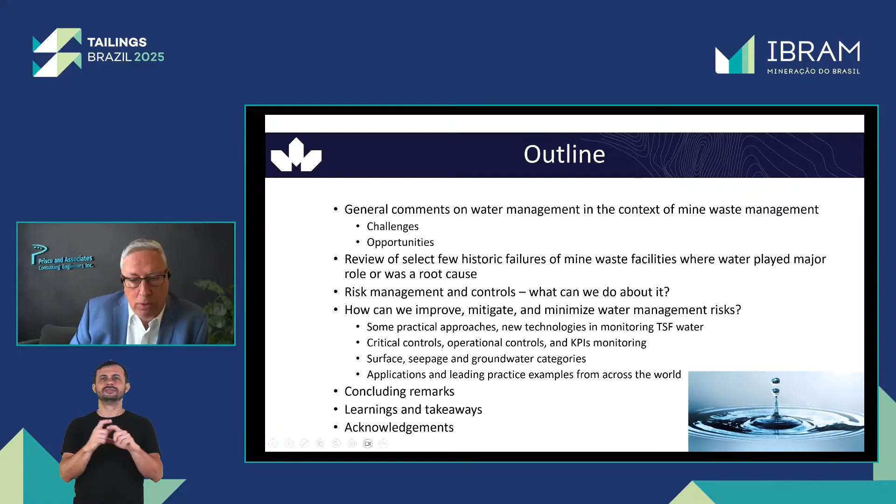So there are some challenges and opportunities with mining waste management and the water management within this. So the first fact, I would call it, is water is either too much or too little. So in a nutshell, nobody's happy.

If you have too much water, tailings managers don't like it, and mining managers don't necessarily like it either. Exploration teams don't really like that either. But if we have too little water, process managers don't like it, communities don't like it, and the stakeholders are not happy with it.

So I put here a couple of numbers that give you a perspective in Canada and the world. You can see in the world you can have variations from the driest place on Earth, which is the Atacama Desert, where you get 5 millimeters a year. So basically it's almost dry by the time it touches the ground.

And the wettest place is somewhere in Mawsynram in India, where they have close to 12 meters of rain a year. So that is basically 11,872 millimeters. So how do you deal with this?

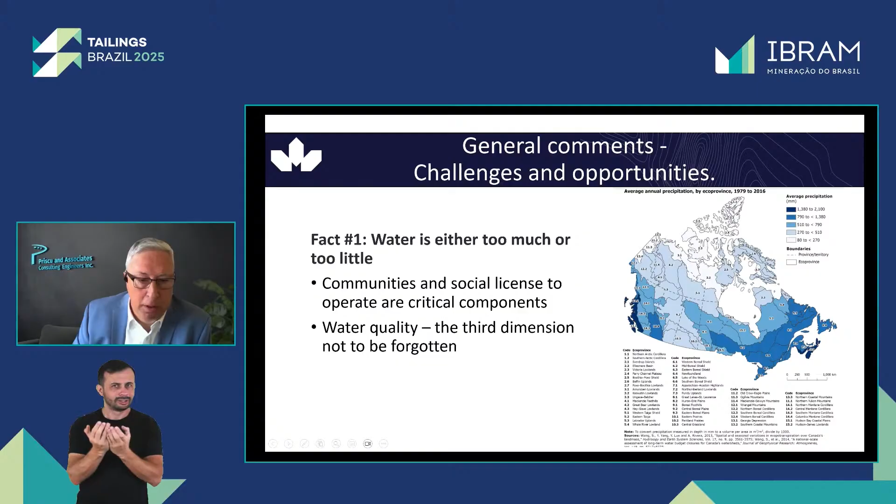And this is very important for everybody to understand. I think many of you in the room would know we had recent failures of even heap leach facilities, tailing stacks, overburden stacks. So just because it's a low moisture content, it doesn't mean risk is not there. We still have to manage it.

This is an example of one of the facilities in Canada on the left side. That is a filter stack tailings facility. This is courtesy of formerly Newmont Mining, a very nice facility, but still the efforts are there to monitor it, to inspect it, and to investigate it regularly.

And then the right side is a paste central cone discharge that, even if you think paste, you still have — you can see in red — some of the embankment dams that you need. So whether you like it or not, there's still water in the blue color, and you still have dams to contain it. So we are not done with it.

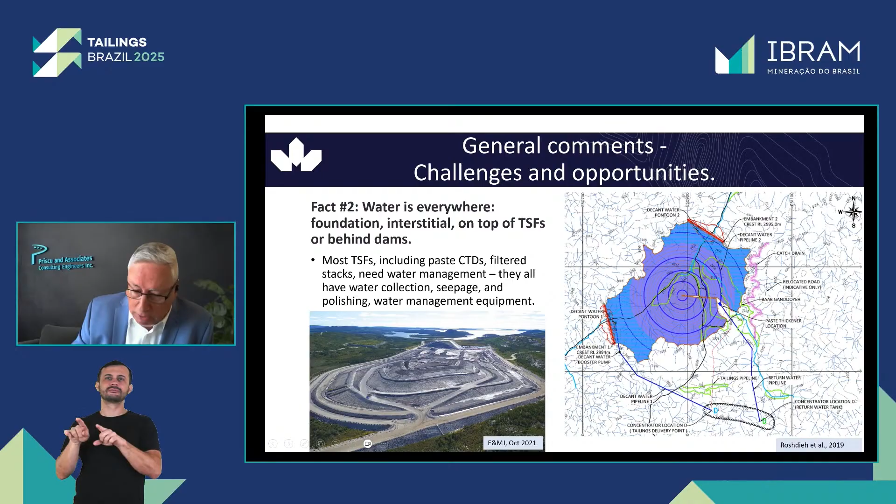Also in the filter stack here that looks so nice, actually in the background, I'm not sure if you're going to see it, but there's a perimeter dike for the entire facility, and at the back there's a water pond and sedimentation pond. So we still need to deal with a lot of water in these situations.

And this is just a summary of some of the tailings facilities that are mostly in South America, which are on the right-hand side. You see here the projected dam height. And just a reminder for those in the room, these are 3 of the top 5 tailings dams in the world in terms of height.

You have the Enlozada tailings facility, courtesy of Freeport, on the left. You have the Cortadera tailings dam, courtesy of Anglo American, in the middle, and the Quebrada Blanca 2 on the right side, courtesy of Teck Resources. Just to highlight that all of these are approved to go over 300 meters. The first two are in Peru. The third one is in Chile.

And the middle and the right side photos show starter dams. So what you see here are just the starter dams, which are between 85 and I think 110 meters tall. So these are basically amazing engineering feats, and kudos to all the teams that were involved in designing and operating this.

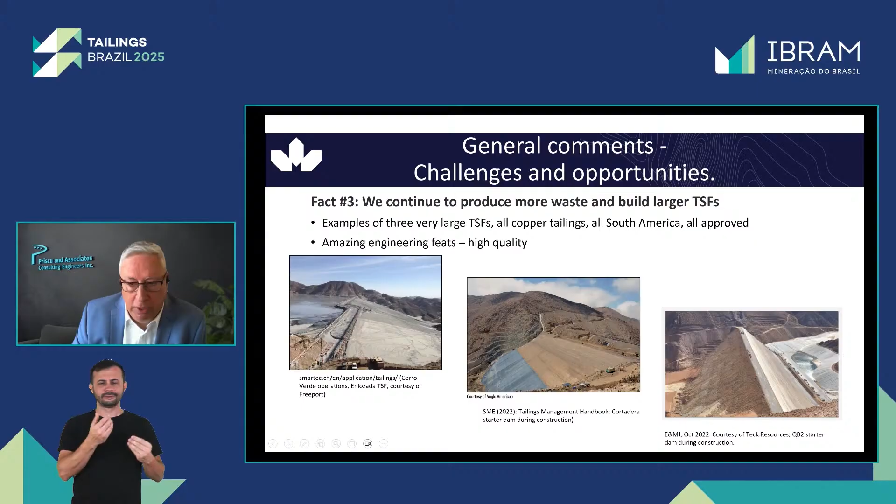But fact number 4 is if you don't have data, there's not much risk management that you can do. This is a famous quote from Edwards Deming, who was actually an economist: without data, you're just another person with an opinion. So we're going to talk today about data and the importance of it in water management. And of course, it all starts with the knowledge base, the information that you have, gathering as much from concept all the way to closure and post-closure.

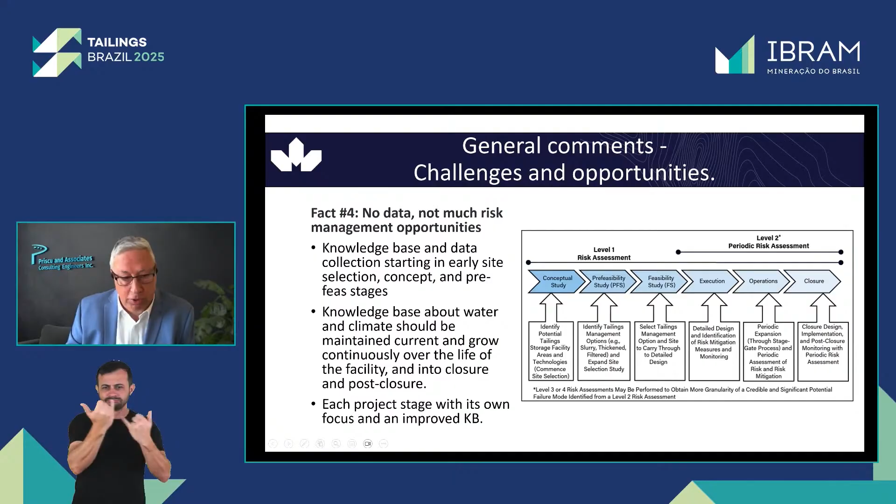There's a lot of technology and data collection from site-specific data. We need to invest in instrumentation and build that knowledge base. We also need to apply climate change models with caution because, to my knowledge, there are about 16 climate change models. I'm not a specialist in climate change models, but each site, each location, each geography is specific, and you need to select the right model.

One model, for example, for the Andes Mountains at, let's say, 4,500 meters, you don't apply the same model as for northern Finland or beyond the Arctic Circle.

These are examples of instrumentation that we need to collect, including the bottom right photo, which is basically an evaporation and climate data collection system that is actually on top of a tailings facility. It's not nearby, it's not at the plant, it's not at the end of the property — it's on top of the tailings pond.

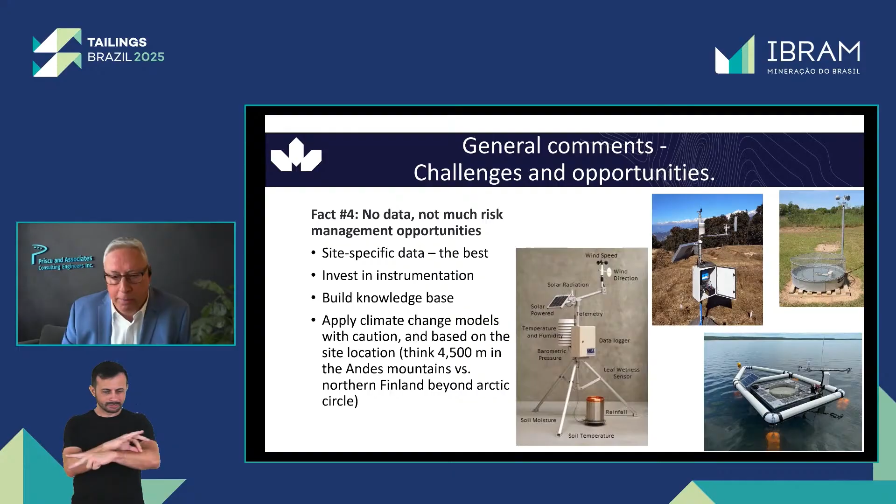So water needs to be included in a regional water balance. A site-wide water balance may not be enough. And of course, calibrations and good quality data are essential.

Fact number 5: I'm not telling you anything new here, but I want to stress that there's a big gap noted in tailings professionals. I've seen some comments out there that it's not really true that we have enough people — I don't think we have enough people. And I would say, as a former consultant, current consultant, but also a former dam owner, the mining industry is actually stealing a lot of bright minds and young engineers from the consulting world, and we are not solving that problem. So we need more training, more specialized courses in universities, and we also need governments to actually recruit quality technical staff to help in this process.

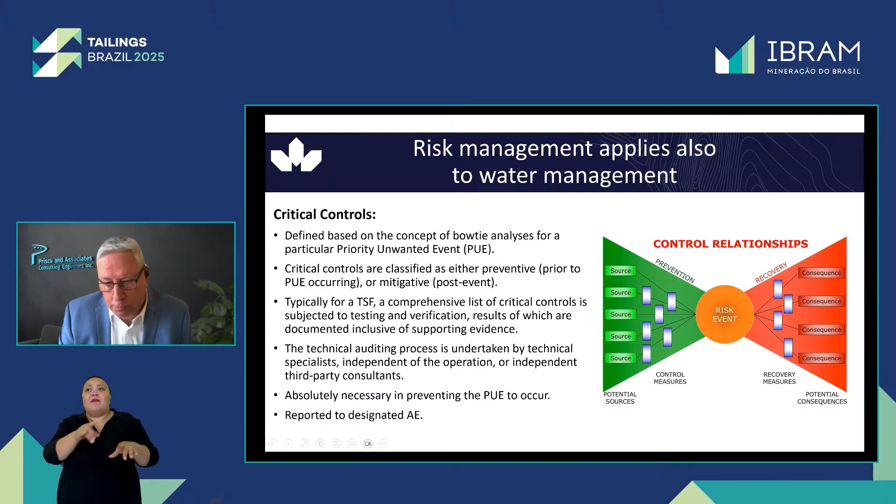Definitely, critical controls are the ones that you want to look at when we are talking about dam safety, and it's a governance approach that is managing high consequence risks. You're familiar maybe with the bow tie approach for risk management. So basically, critical controls are defined based on the priority unwanted event. You can have preventive controls on the left side here in blue, the blue boxes, or basically recovery/mitigative controls after the event. There are many examples in the world, and I'm happy to chat about them, where even after the event has happened, these are super critical to minimize consequences.

Risk controls are typically designated as critical controls if the implementation of the control would significantly reduce the likelihood or consequence of an unwanted event. So it's very, very important to understand what a critical control is.

You basically set up your management, your instrumentation, your trigger action response plan based on critical controls. Operational controls are not critical controls. So when somebody says, for example, your pond volume goes up by 500,000 cubic meters, that's an operational control, not a critical control. The dam didn't fail because the pond went up a bit.

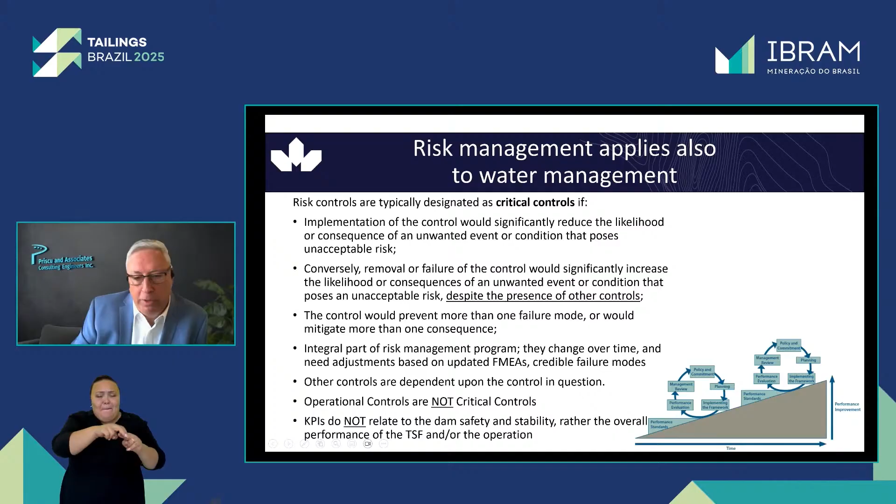Also, KPIs do not relate to dam safety in general, and they rather reflect the overall performance of the TSF. So I just selected a few. I'm not going to spend a lot of time because I want to go into the mitigation.

But are we truly learning from past events? This is a quote from the Irish writer Oscar Wilde, who has a fantastic quote, and I'm sure many of the academics in the room will have a smile when you read this: experience is the hardest kind of teacher — it gives you the test first, and then the lesson afterwards. And it's very much true that we need to be ready all the time.

The Aberfan disaster in Wales, with 116 children dead and 26 adults. You know that — I'm not going to talk again about the geotech, but what was the issue here with water management?

Site investigations were not properly done. The dump was sited over a natural spring, and together with a heavy rainfall event, that went straight into this small town, where there were a few schools. This was a terrible event in '66. So it shows the importance of extreme rainfall events, but also quality hydrogeology — it's critical.

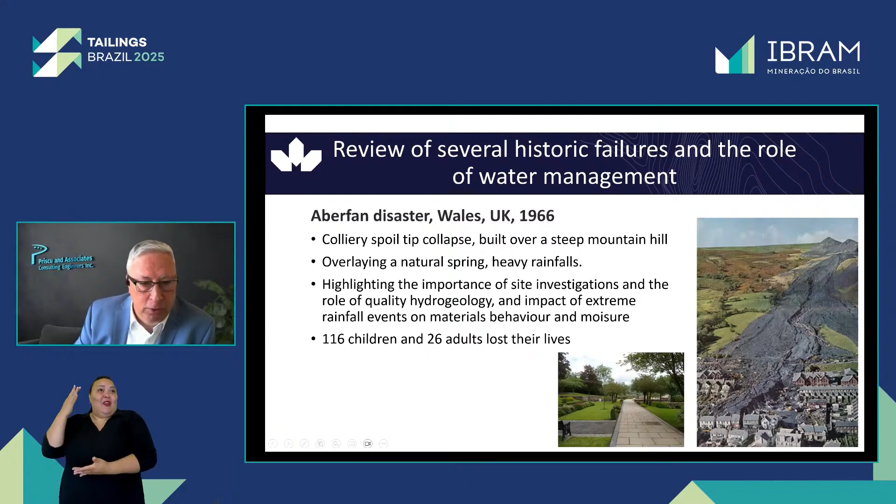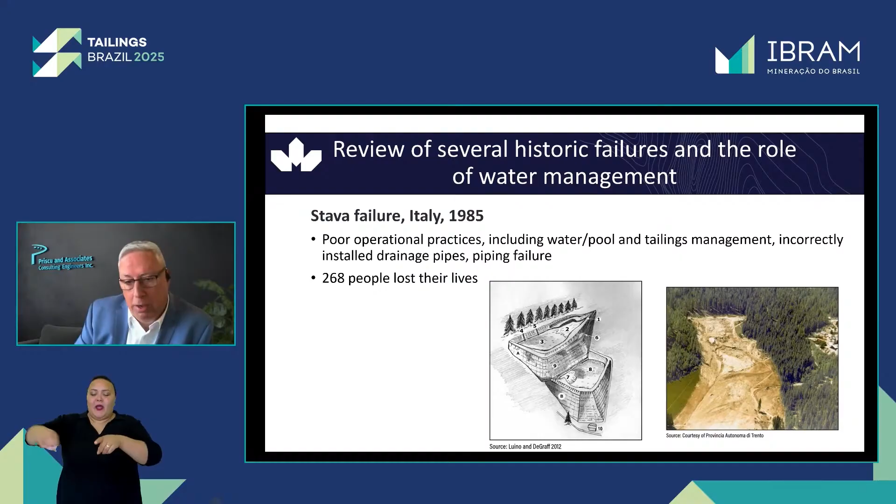This event, Stava, in '85, again water was the culprit. Poor operational practices, poor pool control, incorrectly installed drainage pipes, and piping failure that was spotted but not fixed. Unfortunately, 268 people lost their lives.

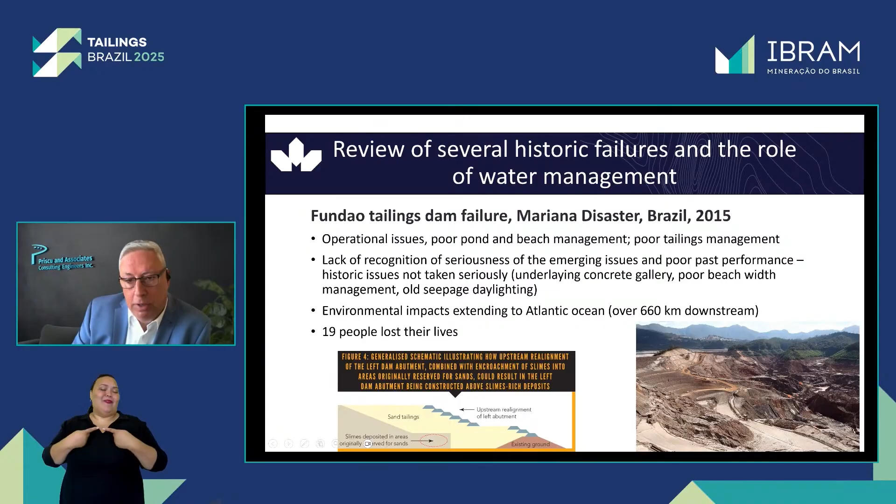And of course, you're familiar with Fundão, and my heart goes to all those affected by this. Again, that was another example of a lack of recognition of emerging issues that existed many years before the actual event. I have a couple of sketches here - the original was supposed to be a low phreatic surface with no slimes here, whereas on the right side it was a high phreatic surface. If we had managed the water and the phreatic surface better, maybe things would have been completely different.

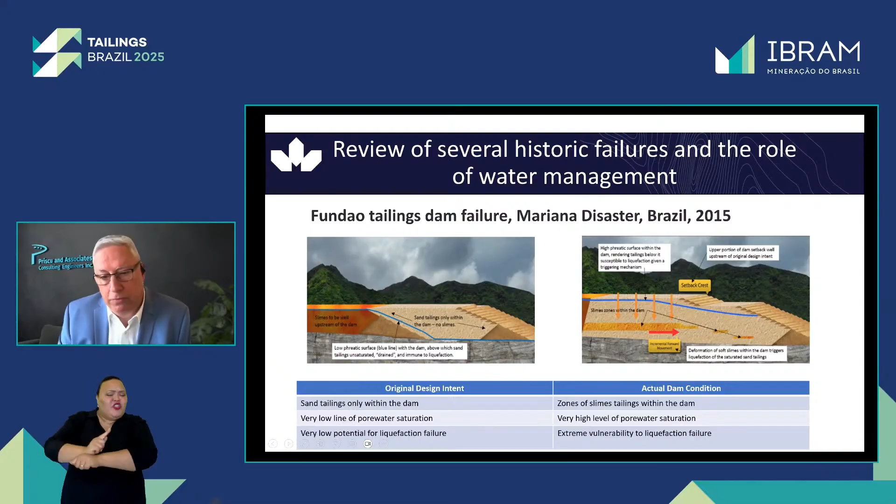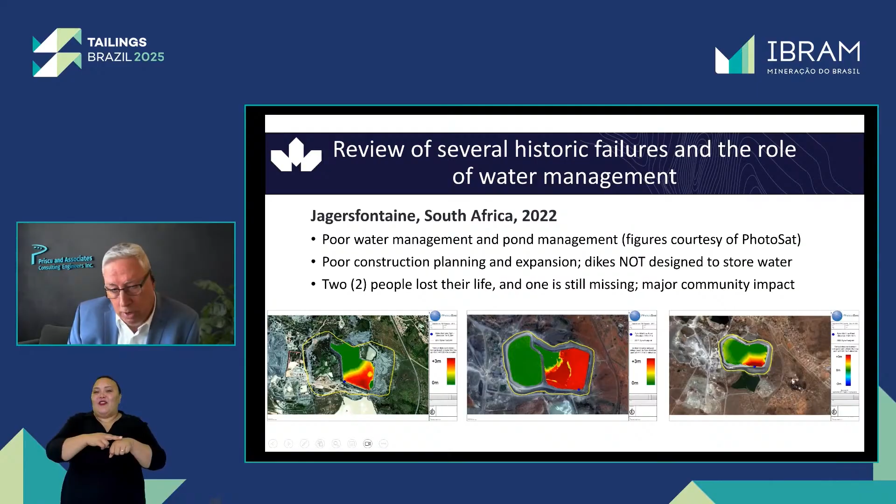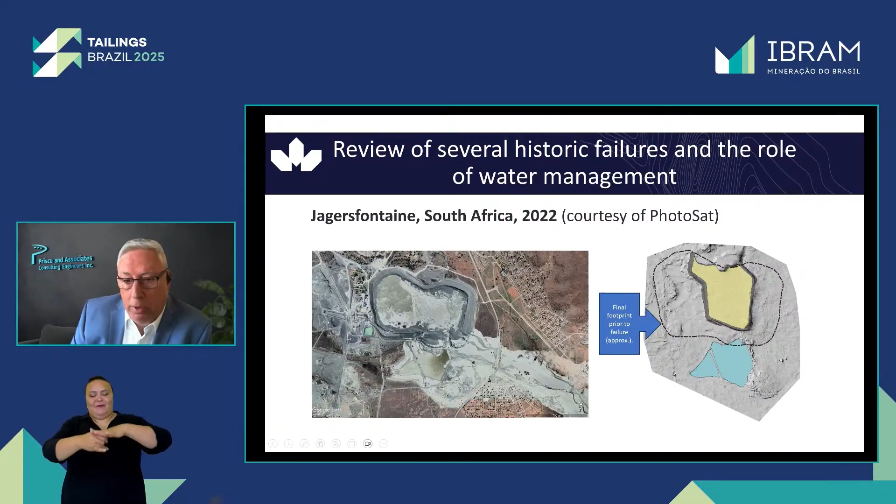Last but not least, I wanted to highlight Jagersfontein, again in South Africa in 2022. Very poor construction planning and expansion, and importantly, the dams and dikes were not designed to store water. Even though this was an old facility, the latest owners - you can see on the left side, the yellow shows the final footprint of the facility, and this was the original. What's shown in green, in reverse here, is that there was almost no freeboard left - very, very poor management. This is the final footprint after the failure, where you can see it was actually touching a downstream pond. So something happened there where you have a wet toe, and also you expanded this with dams that were not designed to hold water behind.

So what I'm going to show you now are real case situations from around the world. I know some of the mining companies in Brazil are up to speed with a lot of this, but I think it's important to share knowledge and see what others are doing. These are real case studies I want to show you - data centers, surface water, monitoring seepage, operational controls, water balances, technologies, and critical controls, what to look for specifically.

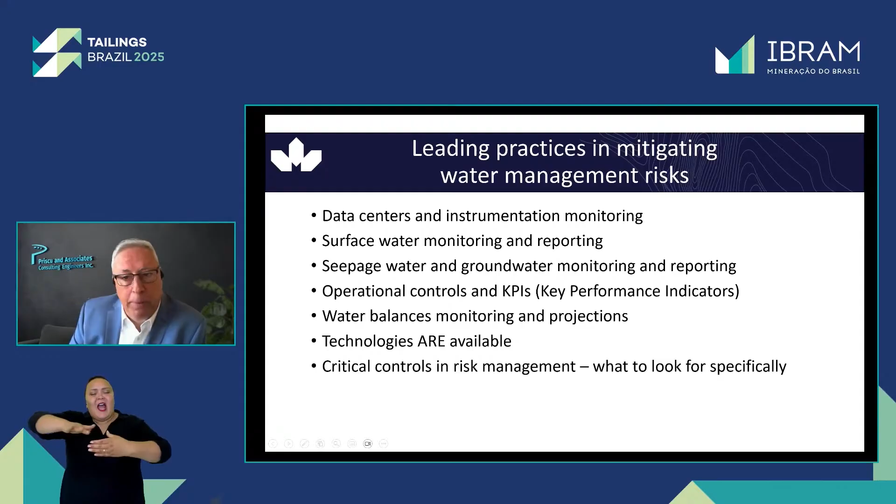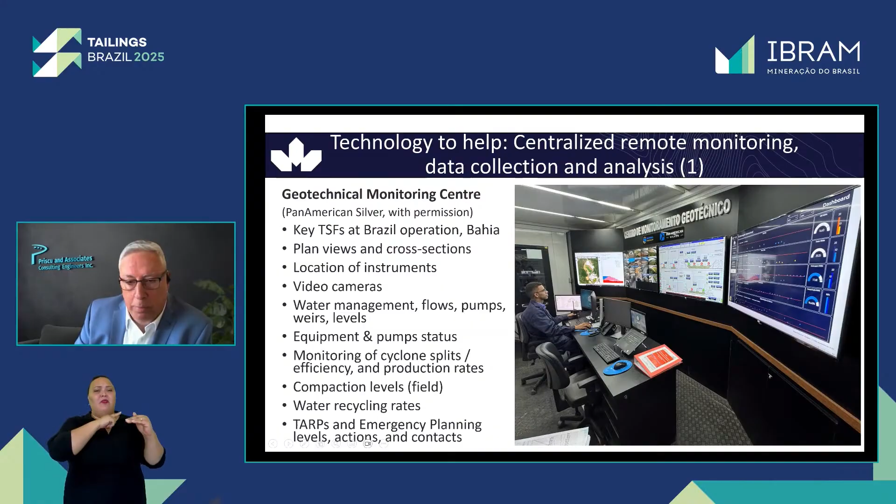This is an example courtesy of Pan American Silver in Brazil, where you have a center. I know other companies have similar centers, geotechnical monitoring centers, but what's interesting to highlight here - you have the cross section in the background of the dam, the view, and in the middle screen they have water management: flows, pumps, weirs, levels, equipment and pump status, even monitoring of the cyclone splits. It's automated and included here. On the right side in the blue screen, they have the critical controls already plotted, including water recycling rates and compaction levels and so on. So a good way to have everything at hand, including water management, tailings management, and flows.

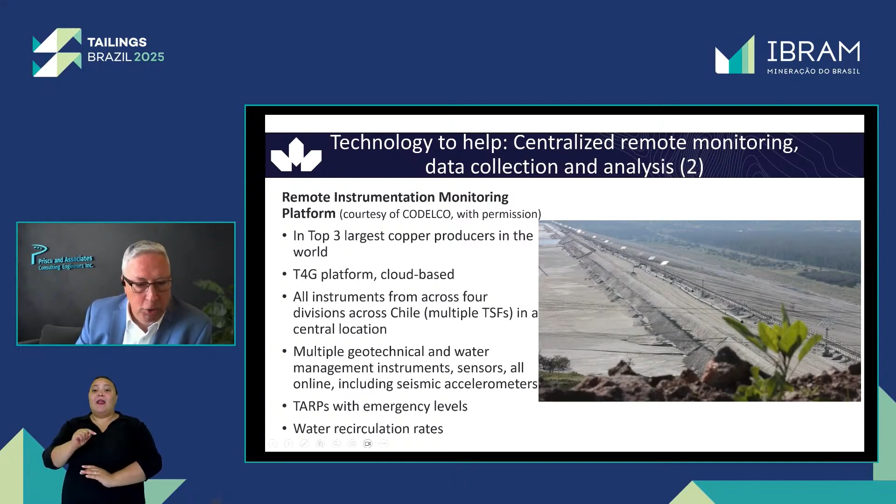This is courtesy of Codelco, with permission - appreciate that. This is one of the major facilities in Chile, belonging to Codelco, one of the top 3 largest copper producers in the world. They implemented a T4G platform where all the instruments come to one center, both geotech and water management, including TARPs with emergency levels.

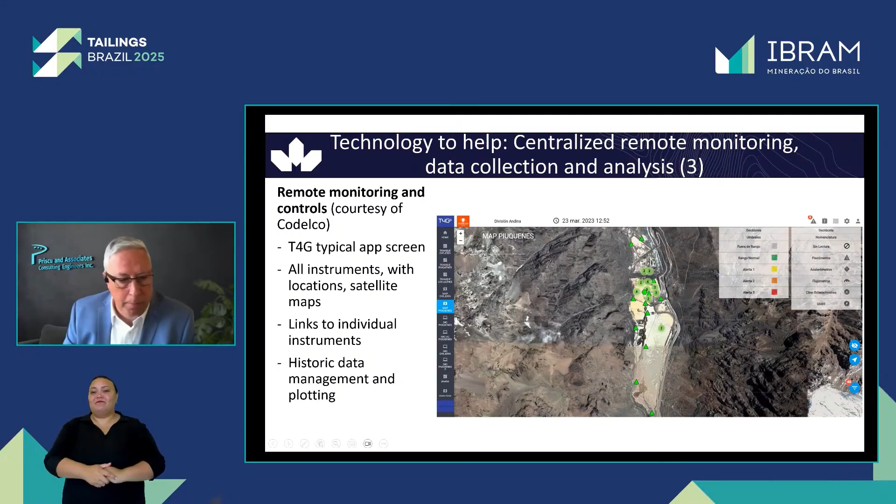This is just a print screen of what they are doing and how they are doing it. Basically these are the instruments and the type of instruments, and the colors give you the idea of the alert levels. The type of instrument is basically the shape of the data. Also, they included historic data in this.

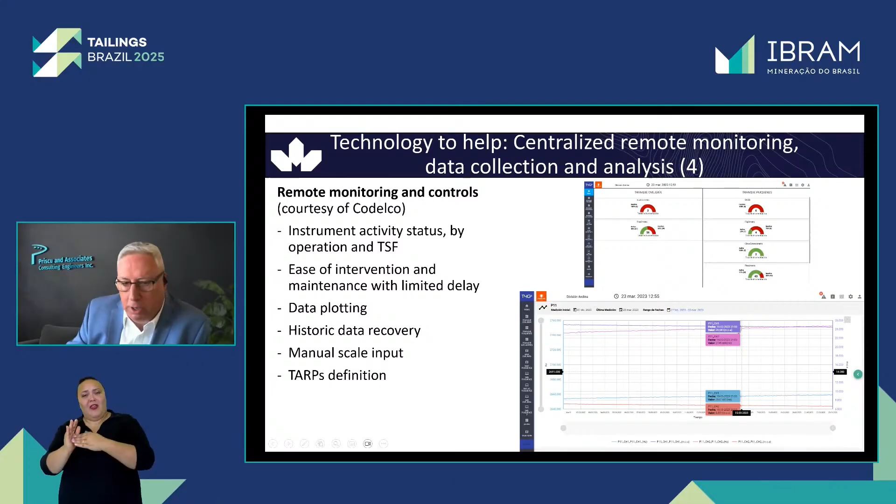And what they get on the screen is each tailings facility - this is Sobejeria, this is another one, Piuquenes. Then they have trends - just giving you an example here, this starts basically in March 2021, and I think it shows till end of 2023. So historic data plotting is important because you want to see trends as well.

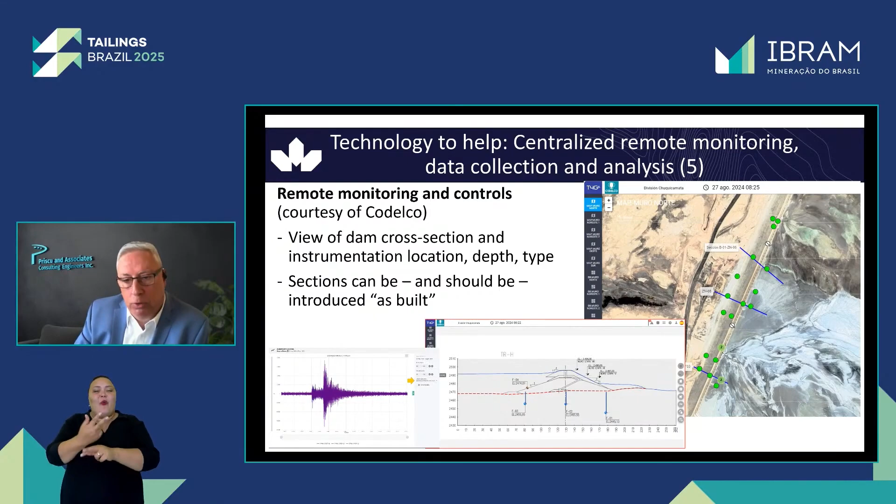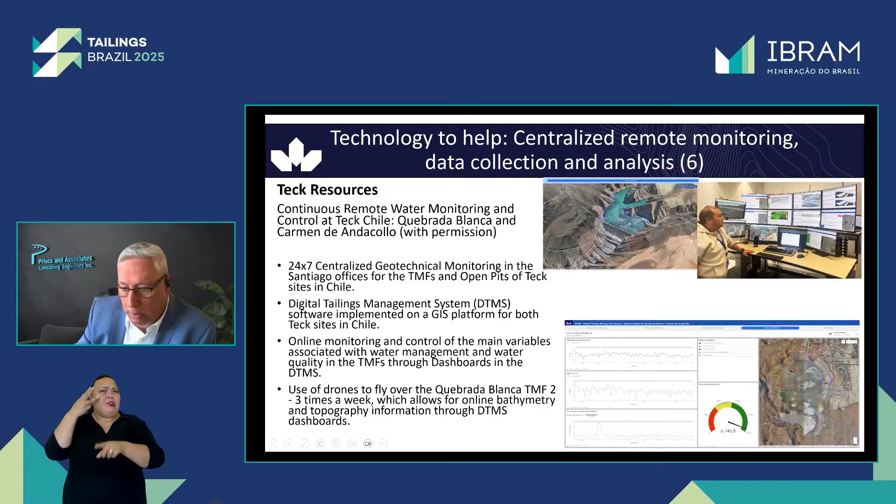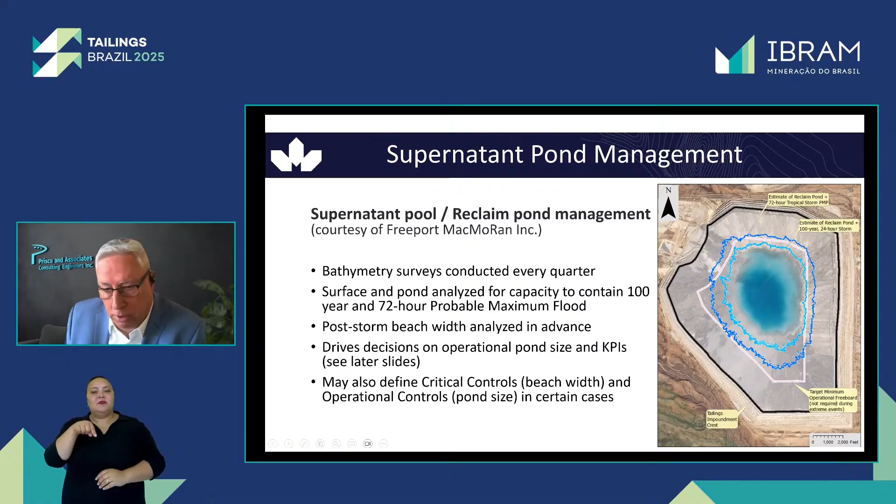The supernatant pool location, reclaim pond management — we know many times the pond goes in places where we don't want it to. This is an example courtesy of PhotoSat, at a site in Zambia, Africa, where the pond was here in '89 and then here in '92. And now they built a tailings facility around the last one, with the pond here in 2020.

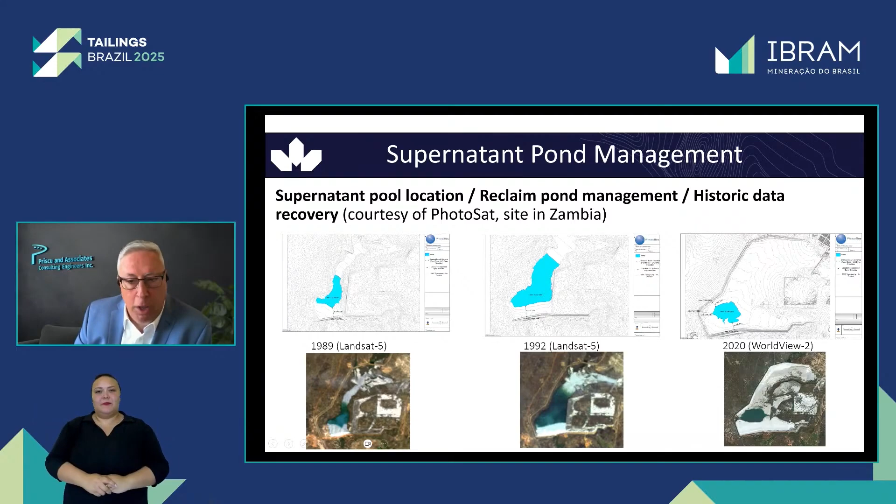By having this historic information from satellite photography, you understand what is underneath the pond, and also where to put your dams — you don't want to put them on a former pond where you might have very fine materials, and so on. Today with satellite technology, you can go back in time and get some very interesting photography.

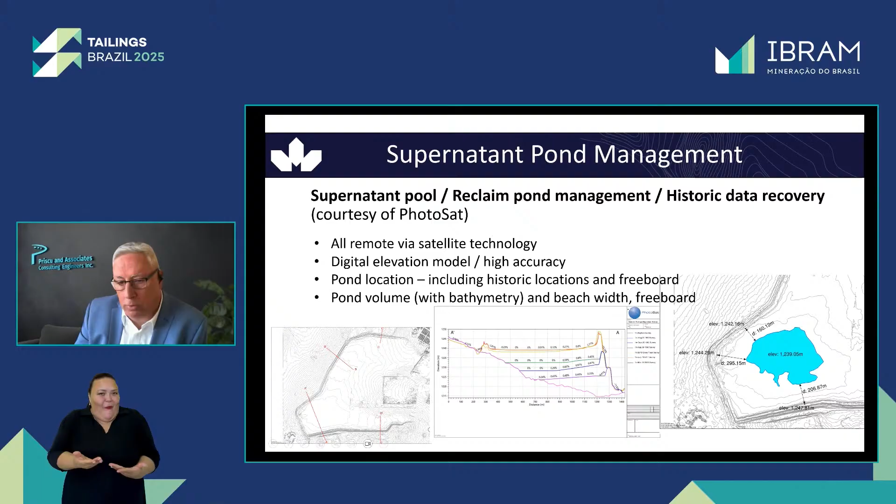Also from PhotoSat, the same site: you can even show the beach length and location and the height of the dam in different years. I think the first one started in '89, all the way to 2000. So you can actually go back in time and see where the pond was, what was impacted or not. And when you combine it with bathymetry, you get very good control of the beaches and the volume of the pond.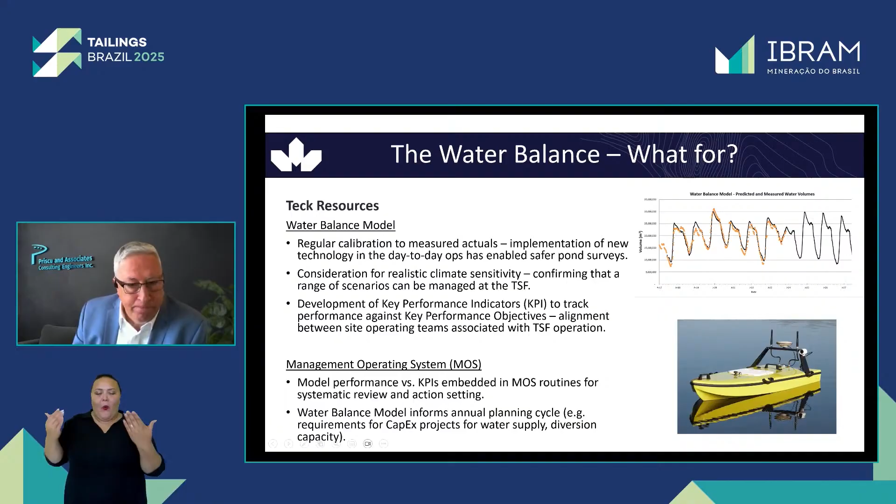Are you having a realistic water balance? This is a way to check it, and you can track that against your key performance objectives, so the alignment between the site operating team and those associated with the TSF means everybody speaks the same language. And of course, nowadays bathymetric surveys are done automated and remotely, so it's very easy to include this in the water balance.

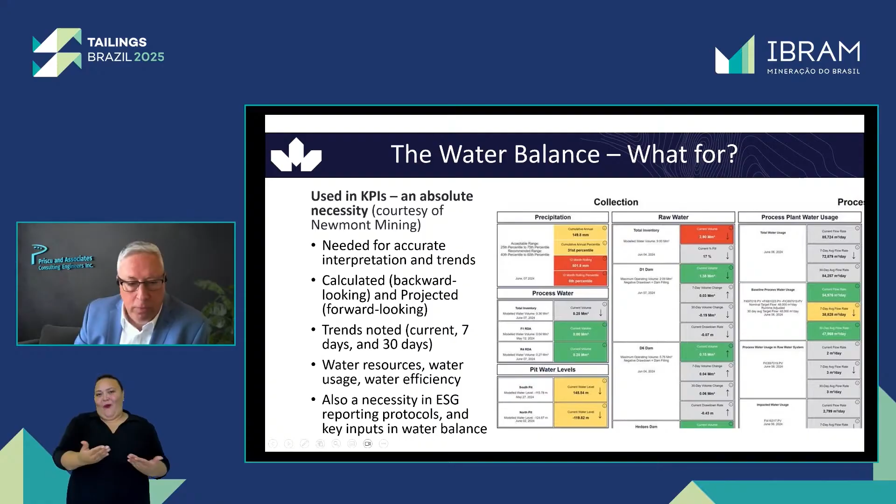This is courtesy of Newmont Mining, where they have accurate KPI interpretation and trends for various KPIs. Some are calculated and some are projected, for example precipitation, process water, pit water, raw water, and not only where they are at but also the trends. So it's the value, but also the trends, because you want to understand what is happening. They have a 7-day, a 30-day, and the current evaluation, and this is quite important for any ESG reporting, as you know very well.

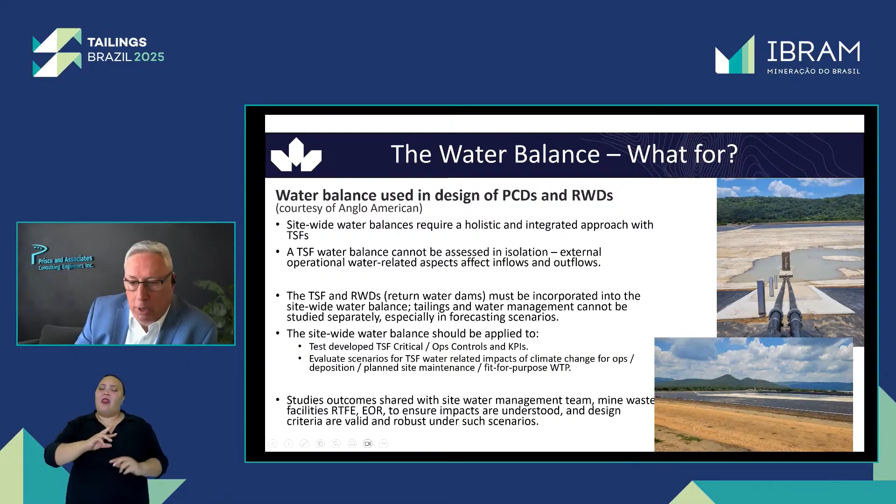Anglo American water balance - this was an example where the TSF water balance was assessed together with everything else at the site. This is an example of a return water dam that was designed at the same time as the tailings storage facility. The two were talking to each other, and they were both incorporated in the site water balance, not just the tailings facility, so it becomes a much better design and more robust.

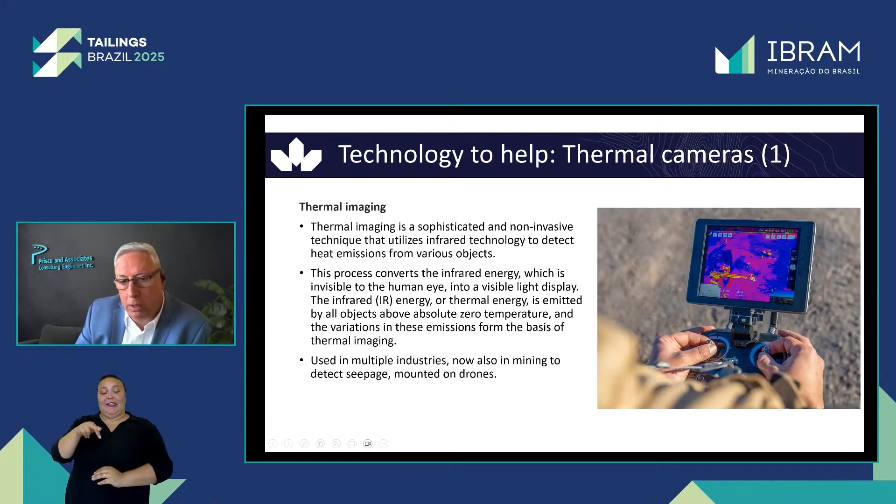For seepage, thermal imaging is becoming quite popular, and we know seepage and internal erosion is a big challenge for everybody. Infrared technology to detect heat emissions from various objects is widely used in multiple industries, but now also in mining. Newmont Mining were kind enough to share these photos, and these thermal cameras can be mounted on drones.

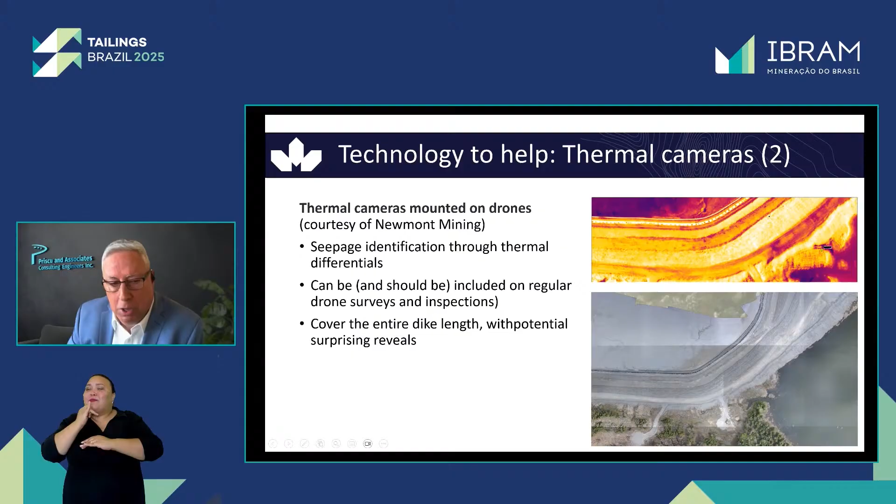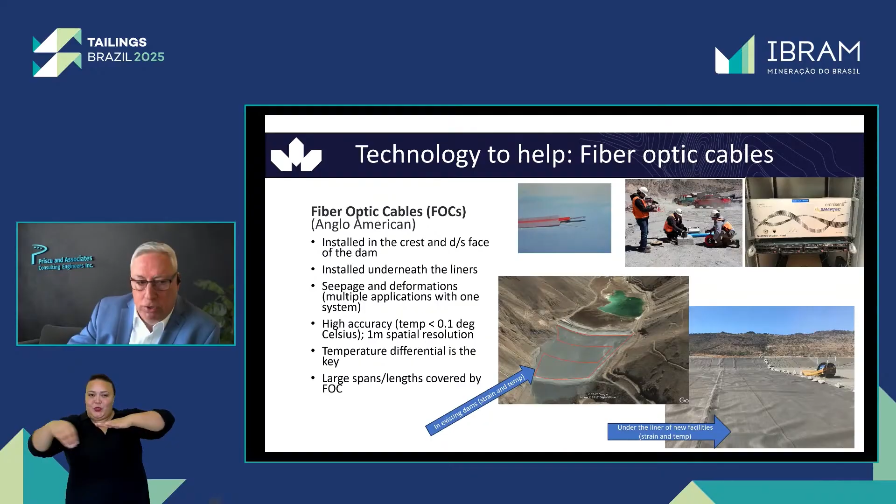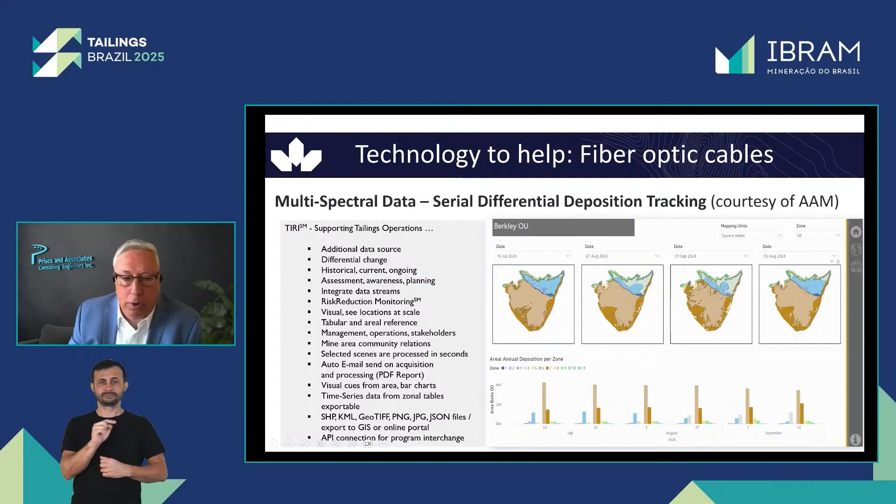So you can actually monitor your tailings management. You can check back where you deposited the tailings last time, whether you deposited in the right location, how much humidity you have in the beach, and so on and so forth. This is really useful for day-to-day operational management of tailings facilities, and this is courtesy of AAM.

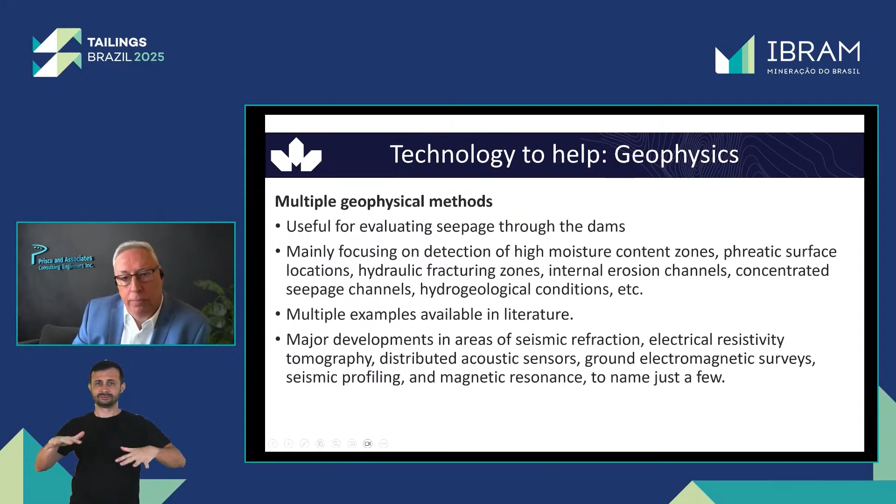Of course, there are multiple geophysics methods, but we're not going to have time to go through them - anything from seismic refraction, electrical resistivity tomography, distributed acoustic sensors which are very popular, ground electromagnetics, seismic profiling, magnetic resonance. I would urge anybody in the room to put together a white paper on all geophysical methods related to water management in tailings storage facilities. There's so much knowledge to share, and of course we need to learn from the mistakes of others, because we don't live long enough to make our own mistakes.

So I'm going to conclude here, Tiago, with a couple of slides. I learned that Mother Nature will always win, sooner or later, so don't try to stop water - rather control it and work with it. Water is and will be omnipresent in and around our facilities. If you think filter tailings stacks are the panacea, the best solution out there, they still need very close monitoring and evaluation, because risk is never zero, actually. Heap leach facilities, the same, waste rock dumps - we've seen high moisture content in waste dumps of finer rock fill, and they had issues.

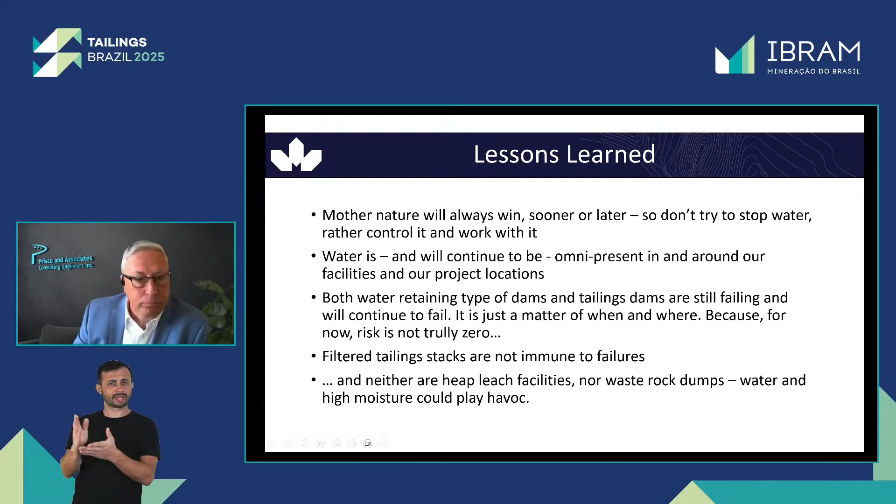Even if mining goes, let's say, to waterless processing, which we hope one day we're going to see, we still need precipitation management, climatic condition, ice formation, groundwater, seepage, aquatic geochemistry. So we are not actually ending water management, and other industries are

going through the same issues. Be aware and read, learn, train, mentor to better implement, have the right staff, the right team, and avoid falling into the trap of poor governance, which is basically ticking boxes.

So my personal message to you is quality data for water management and instrumentation. Start early from concept level and build on your database to reduce uncertainty. Build a more robust design.

If the minimum required is X, maybe you do it a bit more. Follow leading practices. Don't save money on investigation. We've seen some examples in the past, including the one in Aberfan where that was a disaster. That's not where you save the money.

Design criteria aligned with leading practices, and OMS - operation, maintenance, and surveillance manuals - always set up the roles, responsibility, control, critical controls, and reporting protocols, including water management. Sometimes we are focusing too much on the geotech and we forget that water is the one that we need to deal with in the first place.